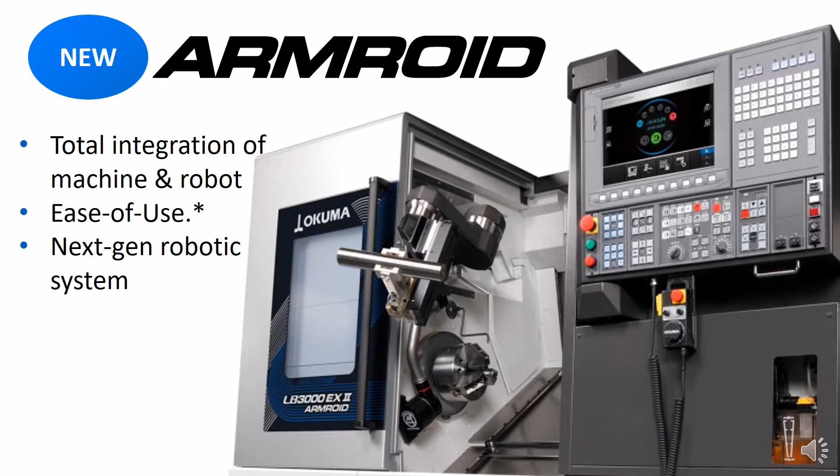Today I'm going to spend a few minutes and give you a general overview of our newest automation product that we've called the ARMROID. The ARMROID series is our next generation robotic system, designed and built exclusively by Okuma to be integrated into the machine tool itself, utilizing an advanced control software that combines with our collision avoidance software to generate all of its own motion path to loading and unloading the machine.

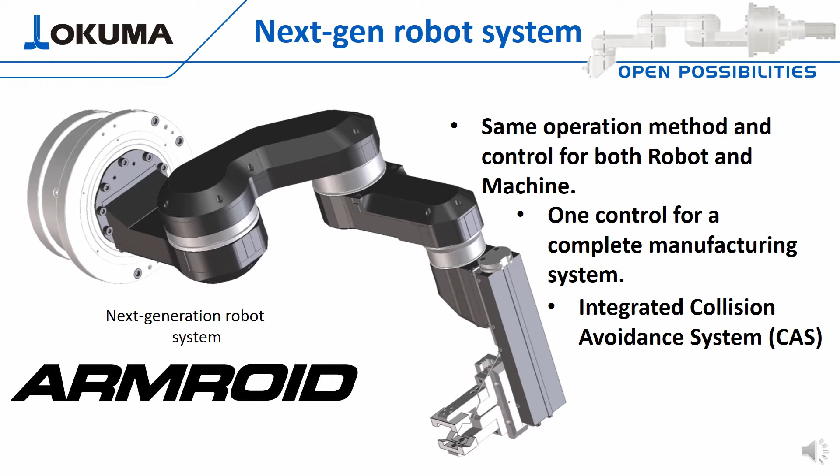The general concept of the automation itself is really meant for the job shop type markets, or people entering into automated processes who don't have the staff available to integrate robots on the floor, to program or teach robots all the machine movements.

For us, we wanted something that could come together as a kitted unit, no different than buying just a turret lathe by itself. You should be able to buy a turret lathe and a robot that is all integrated together as one unit, utilizing the same software and integrated as part of the machine tool itself, so you don't need special operators or special programmers to be able to utilize the automation.

This is an example of a turret lathe, the LB3000, where you can see the robot is truly integrated inside the machine itself. So the robot, instead of being a floor-mounted robot picking up parts and reaching into the machine, is integrated as part of the machine itself, just reaching out to the door, grabbing the part, loading and unloading the chuck.

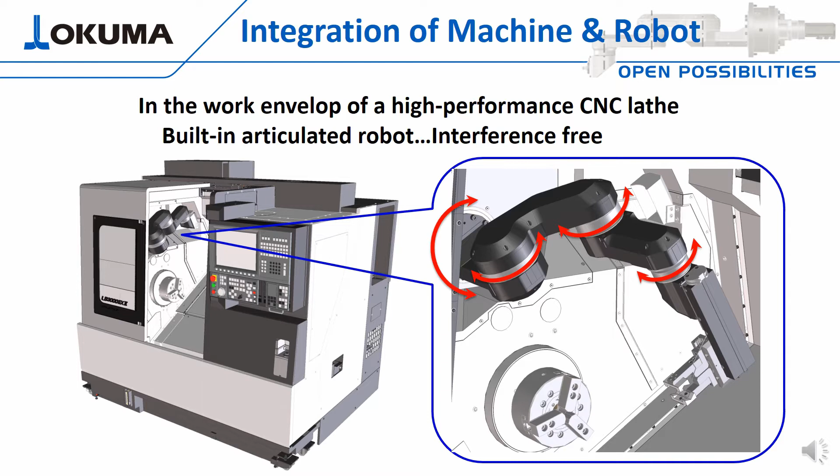It's really meant to address a common phrase we hear: I'd sure love to have a new piece of equipment, I'd love to have some automation on my floor, I just need it to come with the operator itself. Well, this gives us a way to address that. We provide a machine that has its own operator to give you the unattended, unmanned operation hours.

We don't only provide this on turret lathes, we also offer this on our multifunction, higher tech category of lathes. Here you can see a Multus B250 with the ARMROID. This is a 5-axis machine.

Again, the interesting component for me, the most powerful part of this whole system, is the fact that you don't have to have a separate programmer who knows how to program robots. This is integrated to the machine. It uses its own software to create all of its own motion path to get in and out from the load position and through the machine environment, utilizing our collision avoidance software.

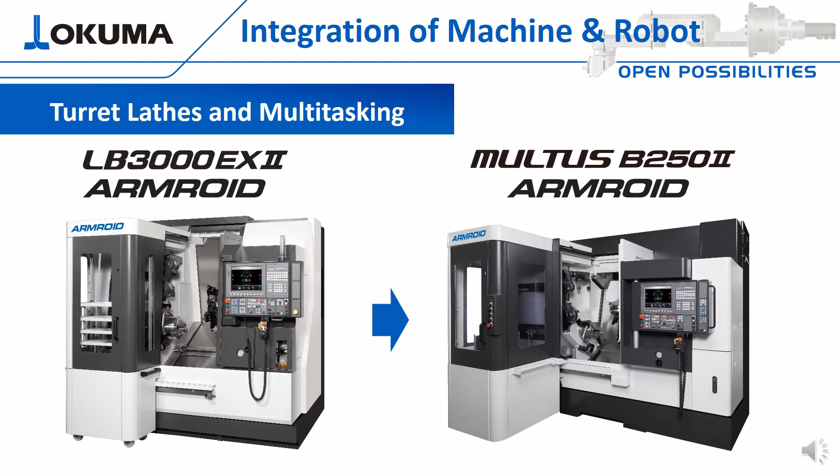The ARMROID is available in a few different models. We have the A101, primarily meant for shaft work. This is a 5 kilogram work capacity and comes with a parallel gripper, just a 2-jaw gripper to grab shaft parts to load and unload the machine.

When you get into heavier work pieces, we offer the A201, which can be configured with either parallel grippers for shaft work, again for 10 kilogram work, or a 3-jaw hand to do chucker work. So if you're doing round blanks, for example, instead of shafts, doing chuck work, we can put the 3-jaw hand on to load and unload the machine that way.

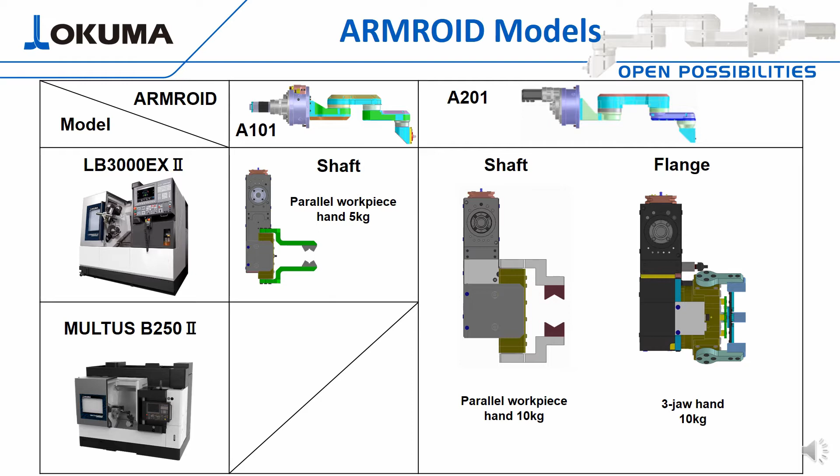The A101 robot comes with 3 different types of end effectors. It has the 2-jaw shaft work component, the end effector that would load and unload the work pieces. It has some additional added value features such as the coolant wand, so the coolant nozzle would actually follow the cut to help from the chip cutting standpoint, to keep stringers from building up, things of that nature.

Or we have a workpiece support that could be utilized. This is a dual roller support mechanism that the ARMROID can use to give a little bit of damping characteristics to the cut itself. So if you're doing long shaft work, for example, instead of utilizing a steady rest, we could put a work support system behind it to give it a little bit more support to eliminate chatter during the cut.

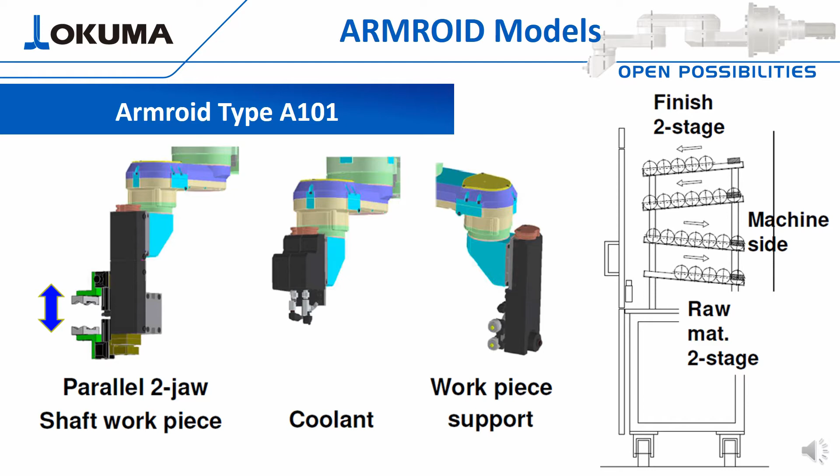In this example, we're showing one of the workpiece stockers. This is a system that would have 4 different racks: 2 would be inbound to the machine, and 2 would be outbound for finished goods.

The ARMROID type A201 is offered with either a 2-jaw shaft work end effector or a 3-jaw flange work. So if you're doing chucker work, for example, this would be where we utilize a 3-jaw hand to grab the parts, load in and out of the machine tool. We still offer the coolant wand as well as the workpiece support system.

In this example, we're seeing the stocker table. This is a traditional stocker table where you're loading up your blanks and it's feeding them up to the pickoff position for the robot. This is a very similar system if you're familiar with any of our high-speed gantries or twin spindle forward-facing lathes running high-speed gantries. It's the same type of stocker mechanism used on those inbound and outbound stockers.

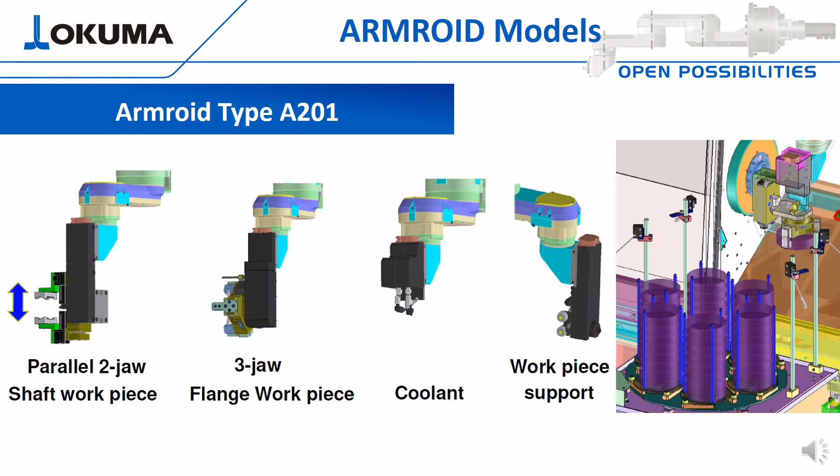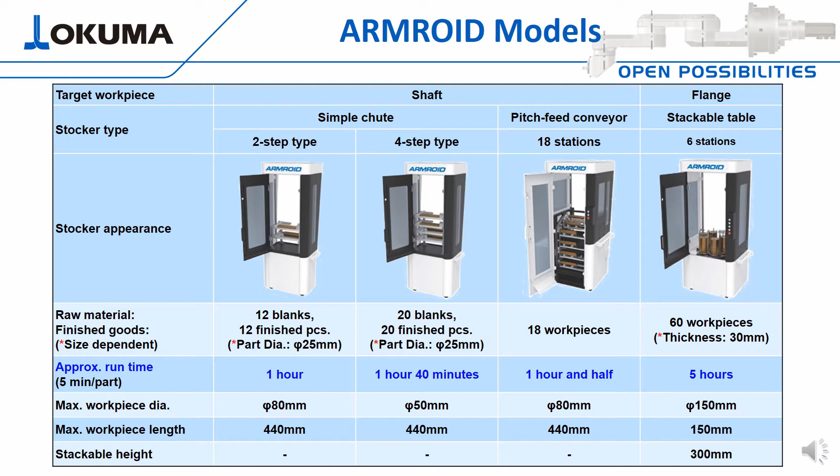If you're using larger diameter work pieces, for example, this may be a time where you'd want to look at a pitch feed system instead. Then we have the flange type stocker, again for your blanks, your chucker type work where you're slugging material and stacking them up. Each of these systems would offer different lengths of runtime depending on the type of work you're doing. The approximate runtimes here are just nominal runtimes based on the same type of part or cutting. Your particular part and cycle times will dictate the amount of runtime you'd get in unmanned operation.

This is a quick overview of the different types of end effectors, starting with the workpiece gripper, which is used to get the parts in and out of the machine tool itself. The work support is for shaft work, anything where you want to add a little bit of damping to your cut. And then in-process chip cleaning.

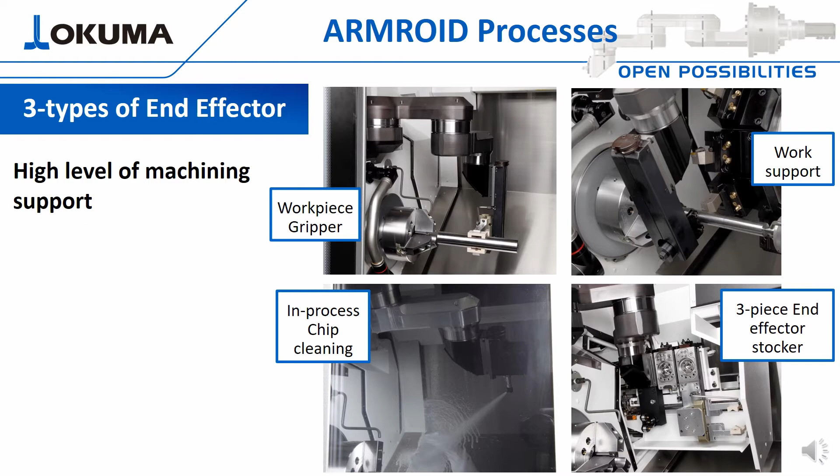This is such an important component. Even if you don't need it for the cut itself, following the cut you can utilize it to clean the inside of the machine, getting into some of the nooks and crannies that shower coolant sometimes doesn't pick up. Any type of accumulation buildup could create problems down the road, so this is another tool you can use to help clean that without an operator having to intervene. And then you can see the end effector stocker itself, a drawer system that comes out from the firewall that stores all the different end effectors.

One thing to keep in mind as we're watching the movement of that robot is you don't have to program any of that movement. It looks at collision avoidance software and the units you're wanting to pick up, as well as the load position that's been defined, and it creates its own path through there, so you don't need a programmer to go in and teach the robot where to go.

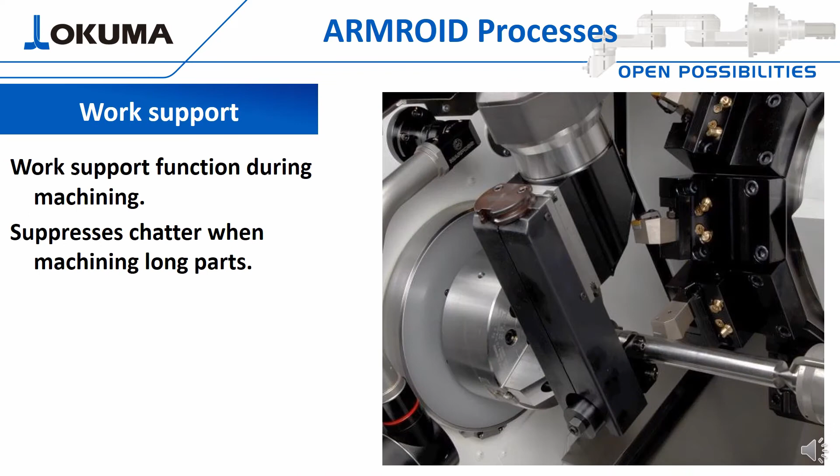The work support, again, is a dual roller type system that's basically like a spring-loaded tensioner, and it's meant to give some suppression to chatter for the cut itself.

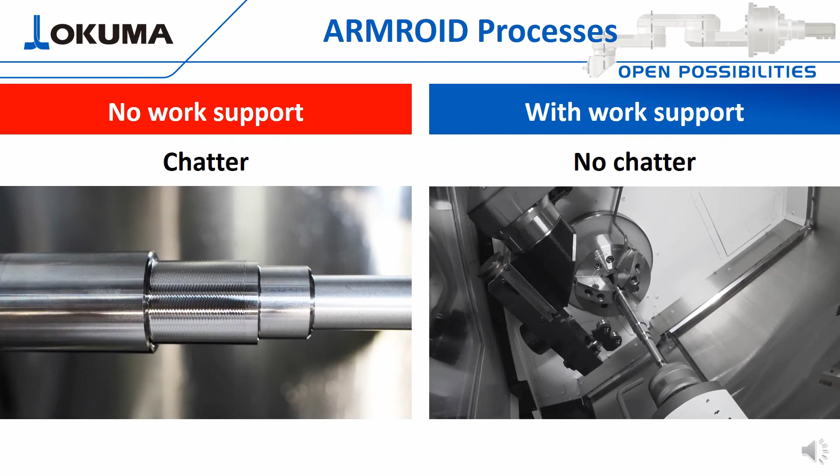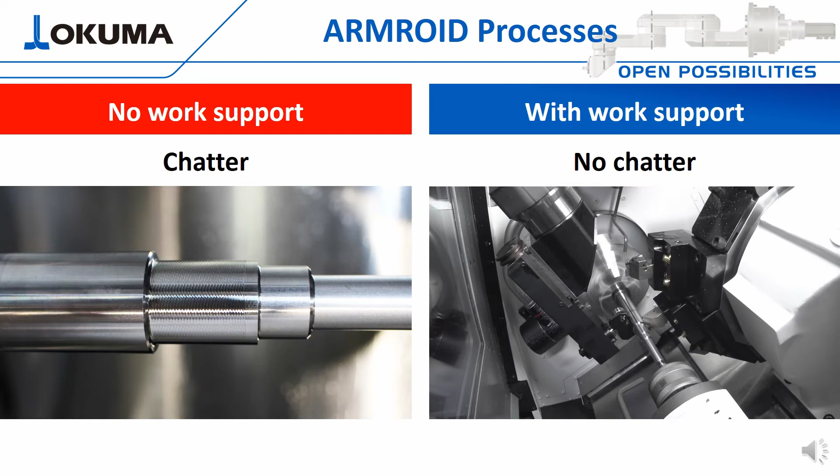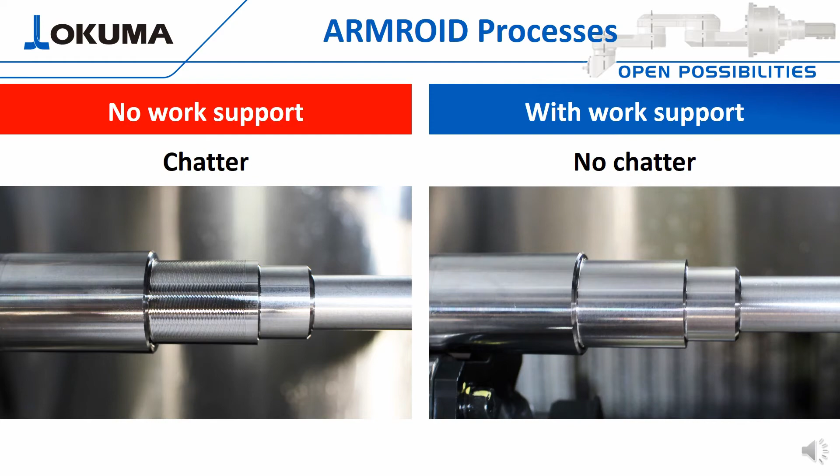So this is a good example, showing one with and one without the work support. You can see the one without work support on that shoulder, for whatever reason, there's some chatter being built up. Once that chatter starts, it's hard to suppress it from that point, versus the one with the work support, which breaks up some of the harmonics that feed into chatter, utilizing a bit of an added value tool from the ARMROID.

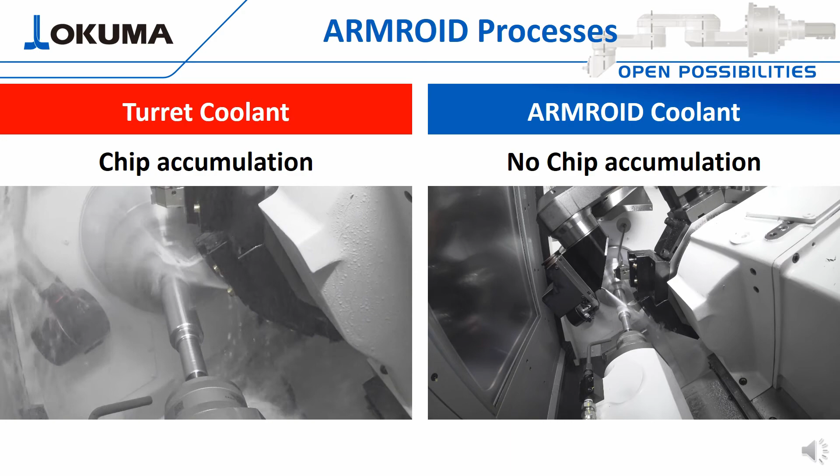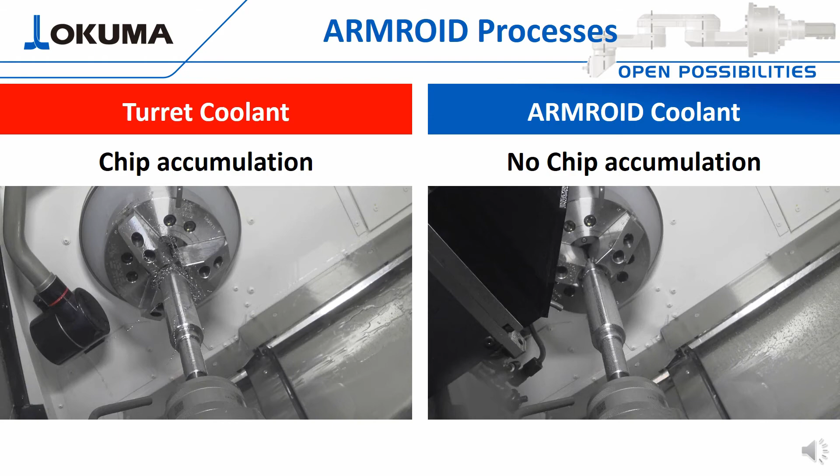I'm trying not to talk over the videos as they're playing, but here you can see an accumulation of bird nest chips from the shaft cut that took place with no coolant following the cut, versus doing the same cut utilizing the coolant nozzle to follow the cut itself, helping break up the chips throughout and keep those stringers from forming, which could eventually create problems in an automated type environment.

Again, the programming of this utilizes the collision avoidance software of the machine tool itself to navigate its way through the machine. So I keep repeating it, but you don't have to teach it how to get to and from the load positions. By utilizing the collision avoidance software, it also gives us the added value of being able to catch interference points before they happen.

Again, this is just another user-friendly function of utilizing the collision avoidance software that it needs anyway to find its path. It helps you, from a setup standpoint, realize that the tool you've got isn't going to clear that cut as you're coming across the part when you've engaged the work support system.

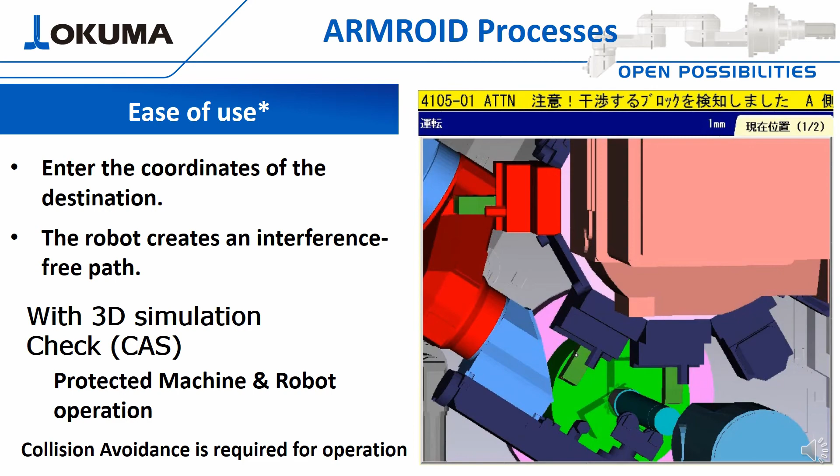The ARMROID can be utilized in a lights out production method, or you can park it in its home position, slide the stoker out of the way, and still run it as a manual type loading and unloading system. So there may be times when you have an operator on first shift running parts all shift, but then you want to slide the unit back or engage it to run in a lights out system on second shift, or get some third shift type hours out of it.

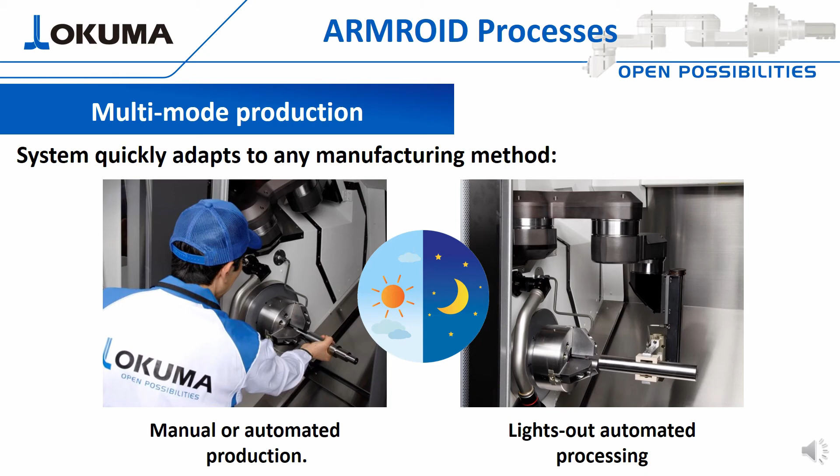The stoker table is on wheels. You pull a pin, it's on a guide rail to the front of the machine, you slide it out of the way, and the operator has full access to the front of the machine, just as he or she would without any type of automation. But then, when you want lights out or unmanned operation, slide it back in place and start your automated processes from that point on.

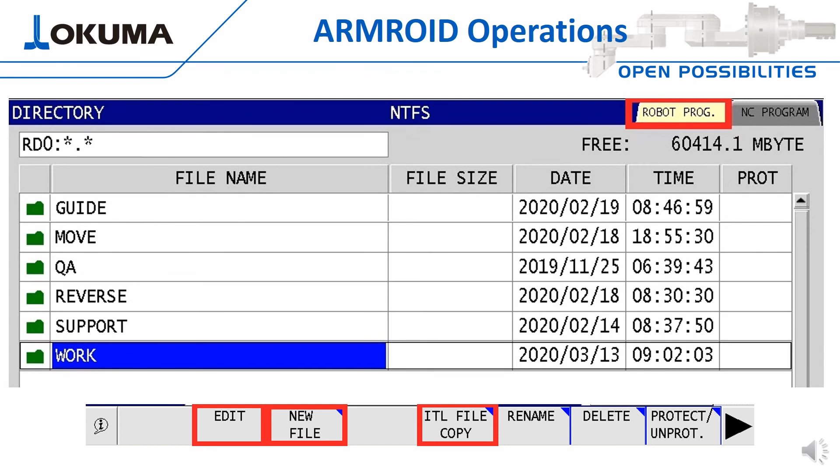As far as interacting, the little bit of programming or setup you have to do for the ARMROID itself, again, it's integrated to the OSP control. So the look and feel, being able to navigate the screens, is the same as what you would see on your traditional type programming.

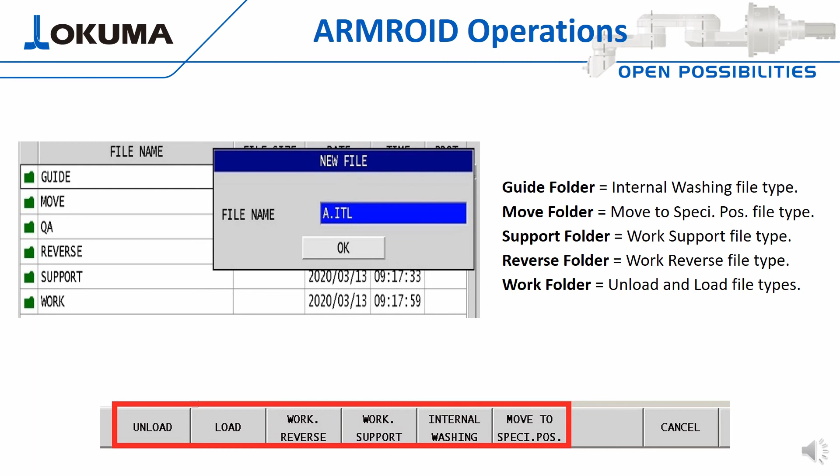All of the different functions you would utilize the robot for are laid out in a very user-friendly fashion, similar to IGF for example. So whether you're loading, unloading the part, flipping it, washing it, things of that nature, there are navigation guides that you step through. All the folders are laid out in a very convenient fashion.

There's a navigation screen with a conversational window that you utilize to tell the robot where you want to pick the part up. Maybe you have a heavy mass on one end, so you need to move the robot closer to where that heavier piece is to grip it. You would define some of those points in this conversational window, and where you want to load on the chuck itself. From that point on, the motion is handled by the robot itself. You don't have to teach any of those motion paths.

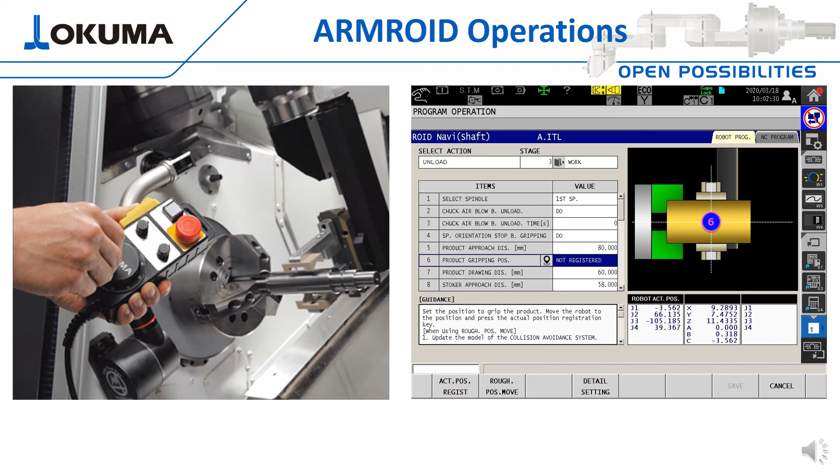So thank you for your time today and joining us for this presentation. Again, this was really meant to be a general overview of the ARMROID itself, to share some insights on what it does, how it functions, and where its strengths are.